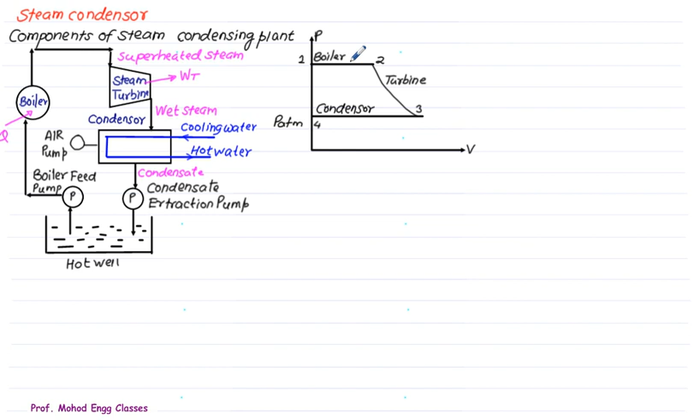The given Rankine cycle can be represented on a PV diagram. Here 1 to 2 is the constant pressure heating process in a boiler. 2 to 3 is the isentropic expansion in the steam turbine, and 3 to 4 is the heat rejection process in the condenser. 4 to 1 is again the feedwater process.

If the condenser is not used, then the expansion for maximum work is up to atmospheric pressure. The steam, if exhausted up to atmosphere, can be given to this, and in that case the work will equal the area 1, 2, 3, 4, from P1 to the boiler pressure to atmospheric pressure.

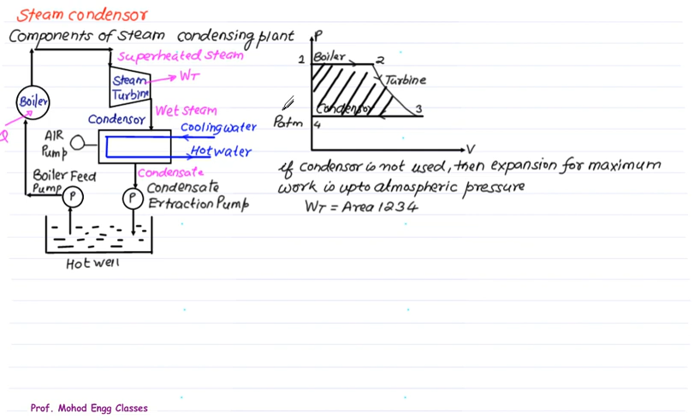If we use the condenser, then it is possible to expand below atmosphere, and in that case there is an additional area represented by 3 to 4, where this pressure is lower than atmosphere. The work developed by the turbine will be 1, 2, 3', 4', and we find this work is more compared to the original work 1, 2, 3, 4 because of this additional area. So this is the extra work produced in the steam turbine because of the condenser.

Therefore condensers are essential and important parts of a steam turbine power plant. Since we keep the same heat supply to the boiler, work done is increased, therefore there is an increase in thermal efficiency. The condenser improves the efficiency of the power plant by decreasing the exhaust pressure of the steam below atmosphere.

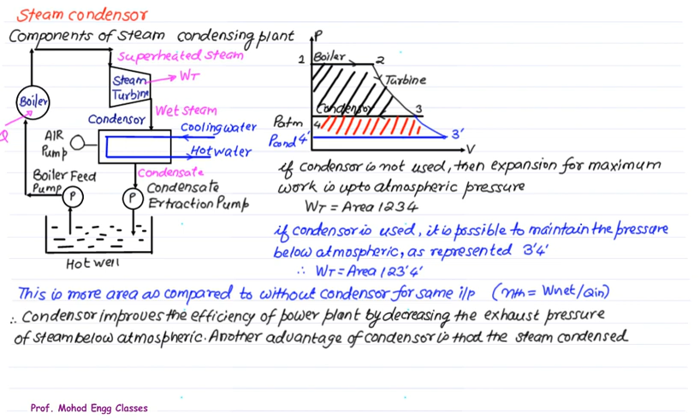Another advantage of the condenser is that the condensed steam may be recovered to provide a good source of feed water to the boiler, and this reduces the cost of the water treatment plant.

Normally we use water from stored water, which needs to be chemically treated. If we use the same water again and again from the condenser, it will save the cost of water treatment.

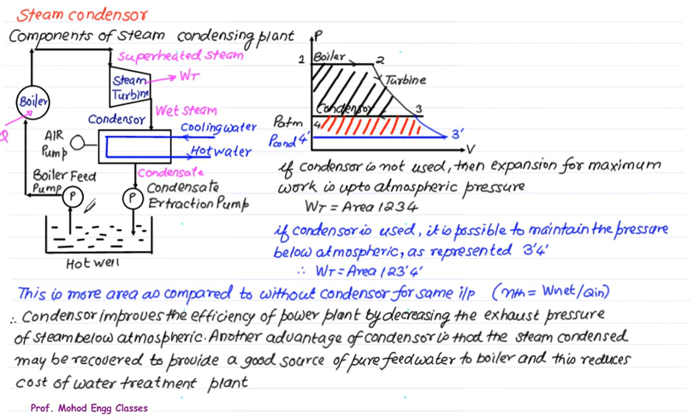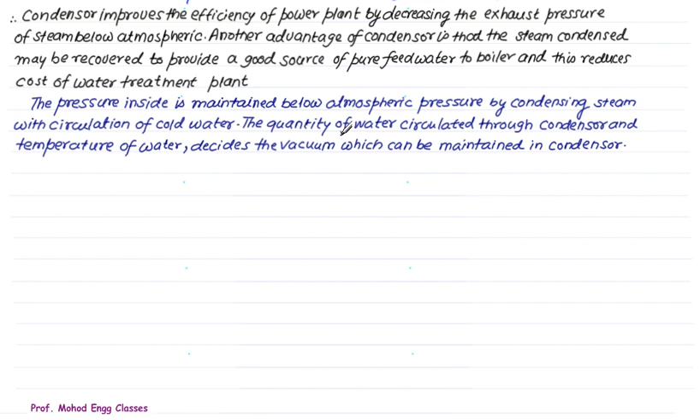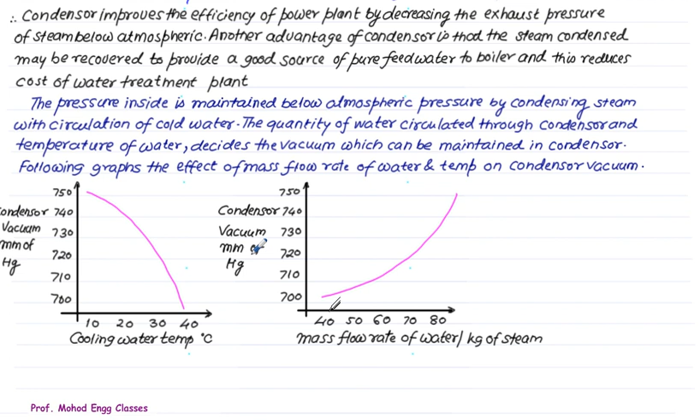If we observe the effect of mass flow rate of water per kg of steam on condenser vacuum, we see that as we increase the mass flow rate, the amount of heat removed from the condenser is very high, so the pressure drops drastically. If we maintain around 80 kg of water per kg of steam, we get a vacuum of around 750, and if we have a ratio of 40, we can maintain a vacuum of around 700 mm.

Before we discuss the condenser, let me give some initial idea about the relation between gauge pressure, atmospheric pressure and absolute pressure.

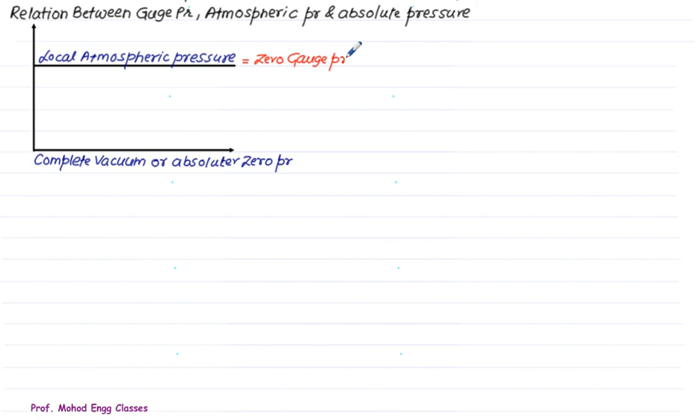If we measure the pressure above this, we get the positive gauge value. Any pressure measured below the local atmosphere is basically called vacuum, or is treated as negative gauge pressure.

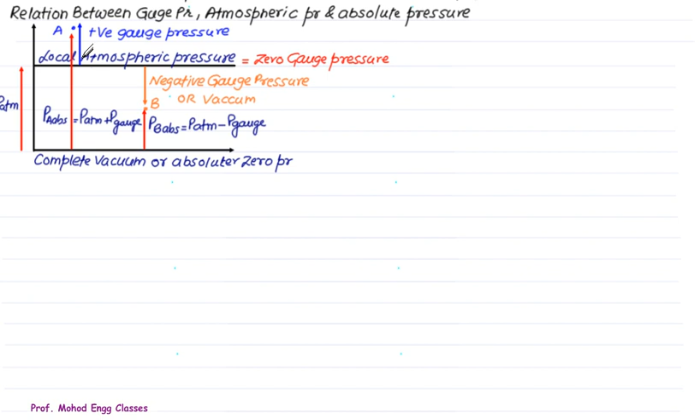We know that atmospheric pressure, particularly local, is measured by using a barometer. Hence atmospheric pressure is also called barometric pressure. The standard value is 760 mm of Hg, which equals 1.01325 bar, not kilopascal.

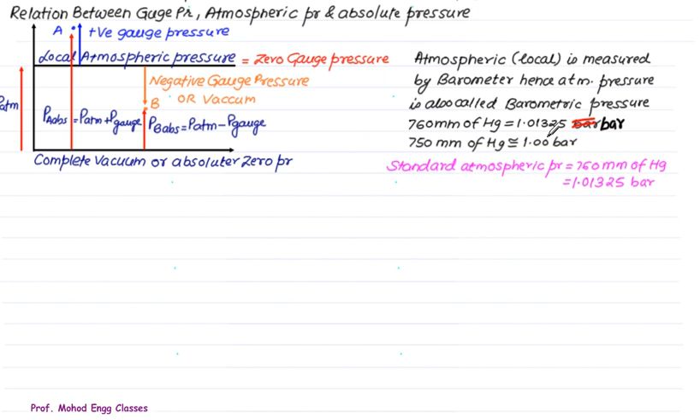Approximately 750 mm of Hg equals 1 bar. The standard atmospheric pressure is 760 mm of Hg, which equals 1.01325 bar.

In case of condenser, normally two terms are used. One is vacuum in the condenser, and this vacuum is to be corrected with respect to the standard atmospheric pressure. Normally vacuum is measured with respect to local atmospheric pressure, and if this vacuum is referred with reference to the standard atmospheric, it is called corrected vacuum in the condenser.

We have the same diagram here. This is zero pressure, and 760 mm of Hg is the standard atmospheric pressure. Let's assume that the local atmospheric pressure is less than the standard atmospheric pressure, though local atmospheric pressure can also be greater than standard. For the present case, we will assume that the local atmospheric pressure P atmospheric is less than 760 mm of Hg. In the problem, if you are given any vacuum, that vacuum is always treated with the local atmosphere.

So using that value, you have to move downward because vacuum is always a negative quantity. If you measure this point's pressure with reference to this one, it is called absolute pressure in the condenser, which we refer to as P mix. So P mix is the absolute pressure in the condenser, which equals the atmospheric pressure minus gauge pressure, or P atmospheric minus P vacuum.

P mix is given by P local atmospheric minus P vacuum. If we try to measure the same value from the standard atmospheric, our P mix remains the same. This reference value, measured with reference to standard atmospheric, is called corrected vacuum, and we know that the P mix is not going to change.

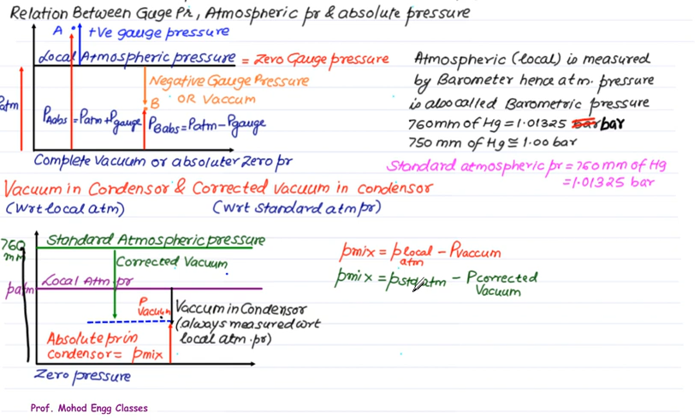Let's take one simple problem here. A vacuum of 68 cm of Hg was maintained in a condenser with a barometer reading of 75 cm of Hg. Find the corrected vacuum to a standard barometer reading of 76 cm of Hg.

In the problem, we have given the vacuum pressure equals 68, and since 1 cm is 10 mm, that is 680 mm of Hg. The local atmospheric pressure equals 75 cm, that equals 750 mm of Hg, and the standard barometer is 760 mm of Hg.

So P mixture is given by P local atmosphere minus P vacuum, which is equal to 750 minus 680, that is equal to 70 mm of Hg, the absolute pressure, which is P mix here.

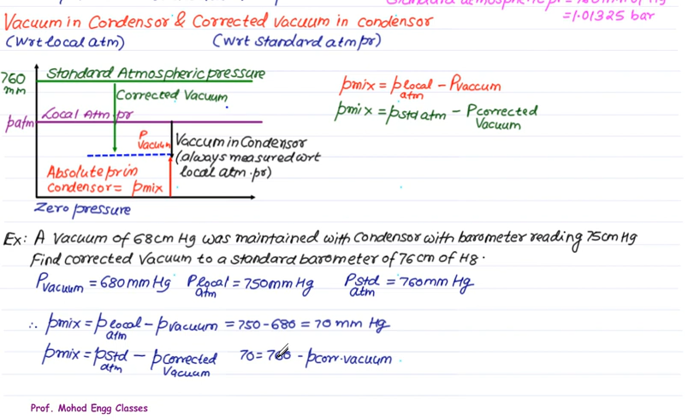This P mix remains the same, equal to 760 minus corrected vacuum. So P mix equals P standard atmosphere minus P corrected. But we already got the value of P mix equal to 70, so we'll substitute 70 here. Standard is 760, so the corrected vacuum with reference to the standard atmospheric pressure is 760 minus 70, that equals 690 mm of Hg.

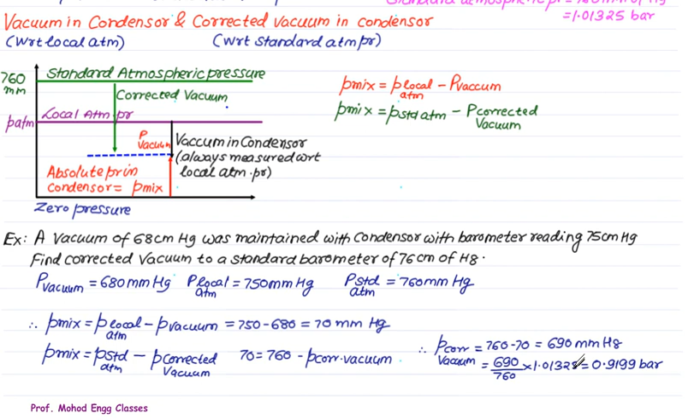We can convert this 690 using a standard conversion ratio: 690 divided by 760 into 1.01325 is approximately equal to 0.919 bar or 0.92 bar.

In the condenser, we normally use Dalton's law of partial pressure, because in the steam condenser we are using steam and air. So we have to apply Dalton's law of partial pressure in the case of condenser. Dalton's law basically deals with the mixture of gases, which consists of a number of phases.

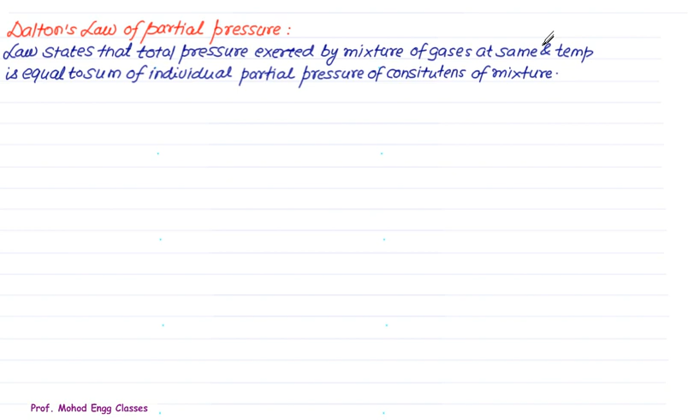The law states that the total pressure exerted by a mixture of gases at the same volume and temperature is equal to the sum of the individual partial pressures of the constituents of the mixture. Suppose a gas has two constituents, gas A and gas B, then according to Dalton's law of partial pressure, the total pressure due to the mixture, P mix, is the pressure due to gas A plus the pressure due to gas B.

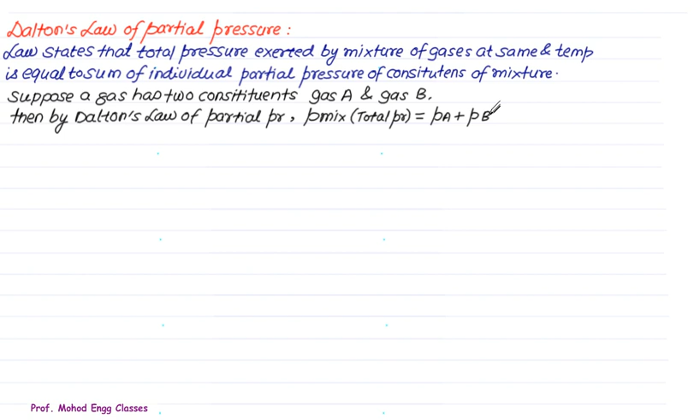The water circulated in a steam power plant contains water and dissolved air. During the boiler operation and the steam turbine passage, they act as a homogeneous mixture of vapor and air. In the condenser, during condensation, this air is liberated from the steam, and therefore the condenser volume is filled by both steam and air.

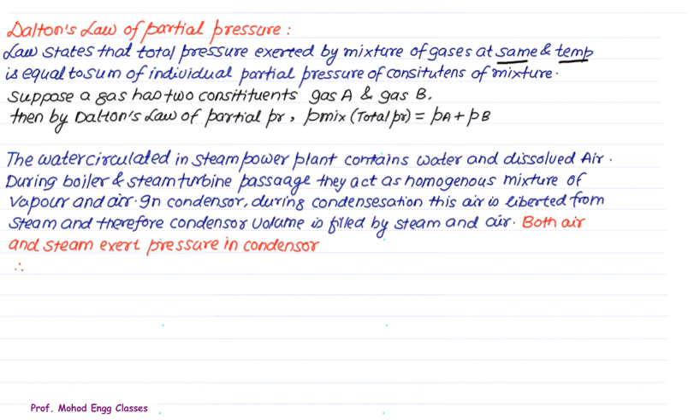Both the air and the steam exert pressure in the condenser. This total pressure is called P mix. The entire condenser volume is filled with the mixture of steam plus air. They are at the same volume and same temperature, so we can apply Dalton's law of partial pressure in the case of a condenser. According to Dalton's law, the total pressure in the condenser, P mix, is equal to the partial pressure of air plus the partial pressure of steam.

Partial pressure of steam we can obtain from the given temperature of the condenser using the steam table. We also know that the total pressure in the condenser, P mix, equals P atmospheric plus P vacuum. So either they provide you data of P atmospheric or data of P vacuum. For P vacuum you have to take the negative value, add it, and you can find P mix. Once we know P mix, we can find the partial pressure of air.

So the actual vacuum equals P vacuum, which is P atmospheric minus P mix. But P mix already equals P air plus P steam, so P vacuum equals P atmospheric minus the sum of partial pressure of steam plus partial pressure of air. This quantity can be increased if this term becomes zero. So ideally, the vacuum will be maximum if the partial pressure of air equals zero. From this we define the term called condenser vacuum efficiency.

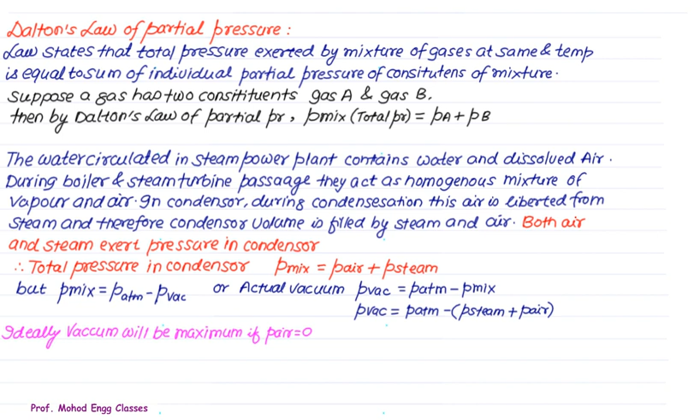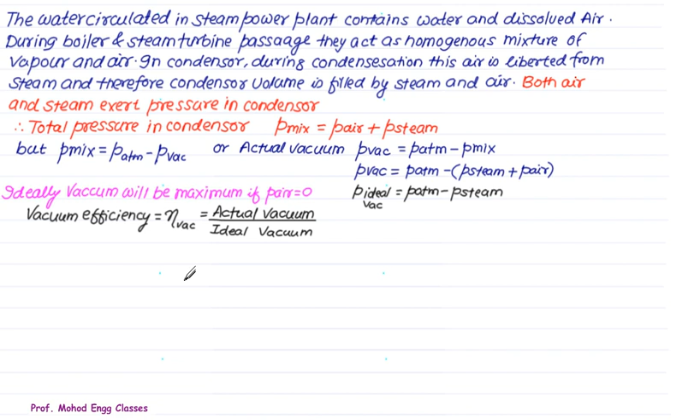So P ideal is equal to P atmospheric minus P steam. The ideal vacuum equals atmospheric pressure minus partial pressure of steam. Vacuum efficiency is defined as the ratio of actual vacuum upon ideal vacuum. If we substitute, P actual vacuum equals P atmospheric minus P mix, and ideal vacuum equals P atmospheric minus P steam. So this mixture consists of both PS plus PA, where PS is the partial pressure of steam and PA is the partial pressure of air.

If there is no leakage through the glands or packing, then P mixture will equal PS plus PA, and PA will be equal to zero because there is no mass of air in the condenser. So P minimum will be equal to PS. In that case, the vacuum efficiency will be equal to 100%, indicating that there is no leakage of air inside the condenser.

Factors which affect the vacuum efficiency: number one is air leakage. As air leakage increases, the mass of air will increase, therefore the partial pressure of air will increase, and once the partial pressure of air increases, the vacuum efficiency will decrease due to the increase in partial pressure of air.

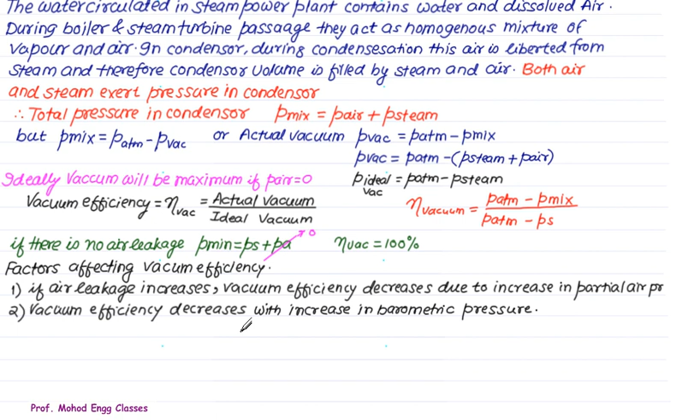Number two, the vacuum efficiency decreases with an increase in barometric pressure. So there are two parameters which control the vacuum efficiency, and we want the highest possible value. The third important parameter is the cooling water flow rate. If the cooling water flow rate is not sufficient, then the pressure in the condenser will increase, and subsequently it will reduce the vacuum efficiency.

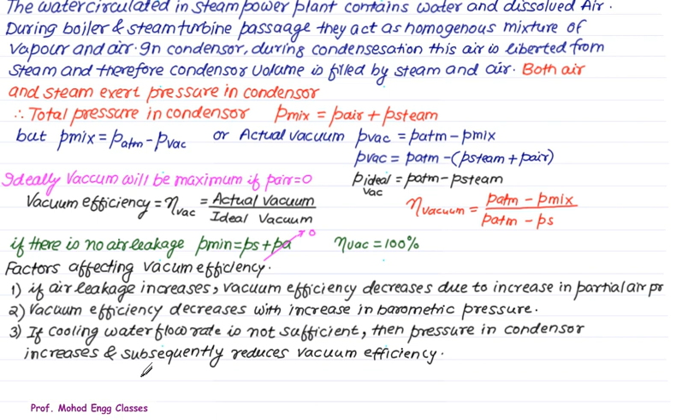Now that we are familiar with the steam condenser, Dalton's law of partial pressure, and the vacuum efficiency, let's do some basic thermodynamic analysis of the steam condenser.

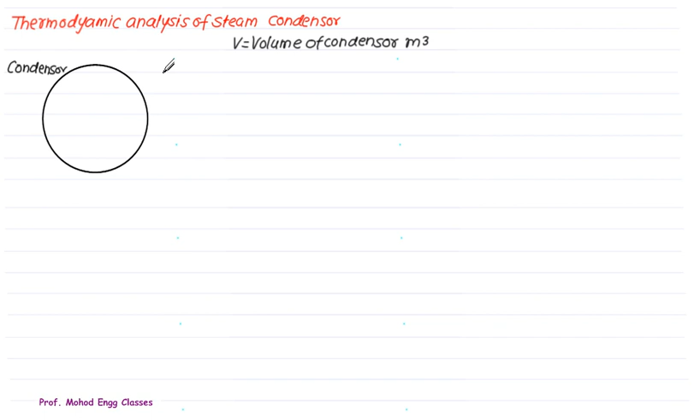Consider one spherical shell, that is a condenser having volume equal to V. This complete volume is filled both by steam and air. We cannot separate air and steam here; that is a homogeneous mixture. So the total volume V is also the volume of air and the volume of steam. For simple thermodynamic analysis, first we neglect the mass of air, and in practical situations also, the mass of air is very small compared to steam, so we can neglect the mass of air to compute the mass of steam.

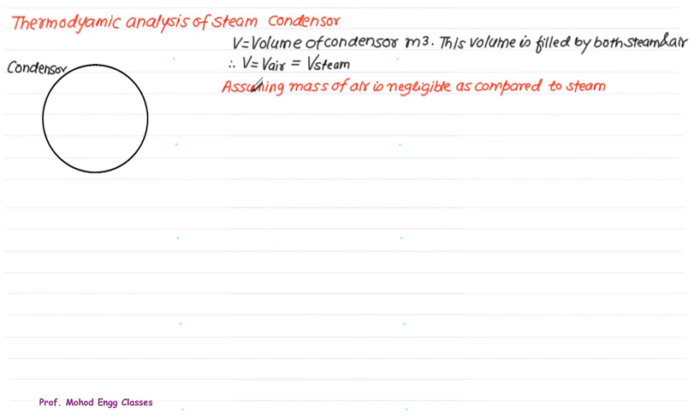The wet steam from the turbine passes through the shell side, and the condensate is collected from the bottom side. Let m dot s represent the mass flow rate of water or condensate in kg per second.

At inlet to the condenser, the point number 1, we will say H1 is the enthalpy of steam at inlet. Depending upon the condition of steam at the turbine outlet, we have H1 equal to Hf plus x Hfg when the steam is wet and Hg when the steam is dry. So at exit we have a condensate, which is the liquid water.

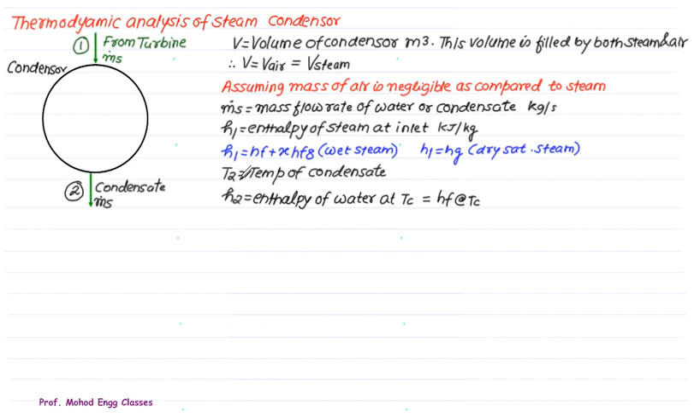So let's say T2 is the temperature of condensate. Many times we will denote this by Tc also, C for condensate. H2 will be the enthalpy of water at Tc, which will be equal to Hf at Tc. So steam is flowing with the mass flow rate of ms. H1 and H2 is the change in enthalpy. So Q, the heat rejected by the steam, is the product of mass multiplied by change in enthalpy, H1 minus H2.

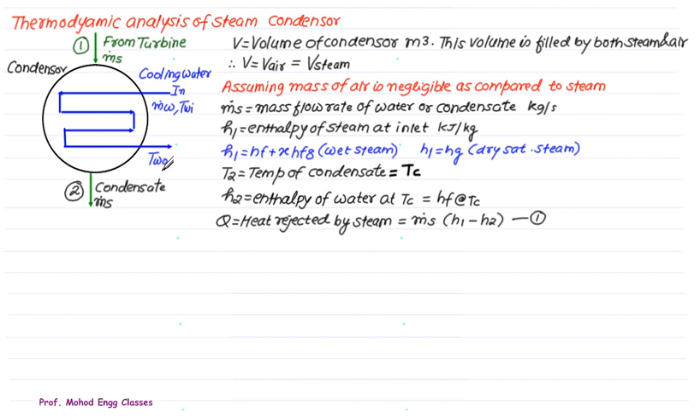The heat rejected by the steam is carried away by cooling water. So cooling water is flowing through a number of tubes. Let m dot w represent the mass flow rate of cooling water and the corresponding inlet temperature is TWI, and let the hot water temperature be TWO. Mass flow rate of water is in kg per second, same as the steam. TWI is the water temperature at inlet and TWO is the water temperature at outlet.

The heat gained by cold water, which is rejected by the steam, is Q equal to m dot w into CPW into TWO minus TWI. CPW you can take as a standard value, 4.186 kilojoule per kg per Kelvin. If we balance this, we can find out the quantity of water required for the above cooling effect.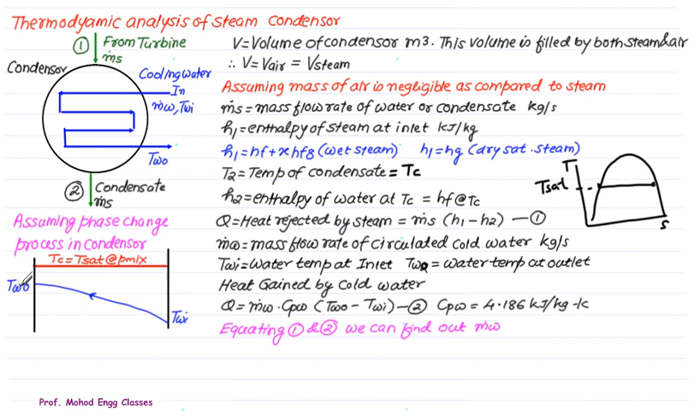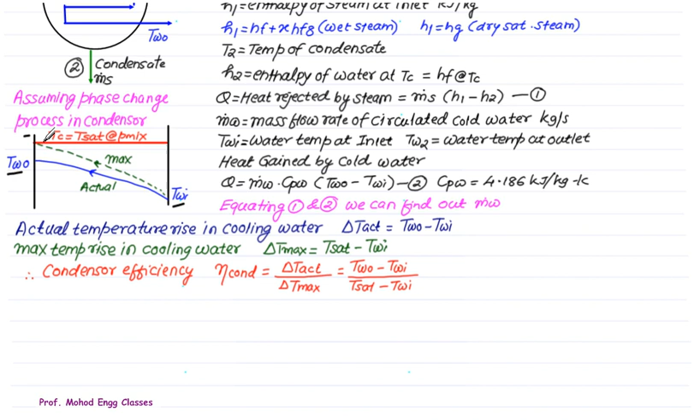The maximum possible temperature rise is possible if the outlet temperature is equal to the Tsat of the condenser. So the maximum temperature rise is possible in the case of ideal situation. The maximum rise is Tsat minus TWI and the actual is TWO minus TWI. This is just an ideal situation. Since we have an actual rise and a maximum rise, we will define the condenser efficiency as the actual rise in the temperature of water upon the maximum possible rise. Actual rise is TWO minus TWI, maximum rise is Tsat minus TWI. This efficiency is very high, around 90 percent.

The calculation for mass of steam and air. So we have the same shell, V is the volume of the condenser, and this volume is entirely filled by both. So volume of air is the same as the volume of steam. We know that Pmix is equal to the actual pressure in the condenser, which is equal to atmospheric pressure minus the vacuum. Whenever we have vacuum we have to use the minus sign. The same pressure is also equal to the steam pressure plus the partial pressure of air by using Dalton's law.

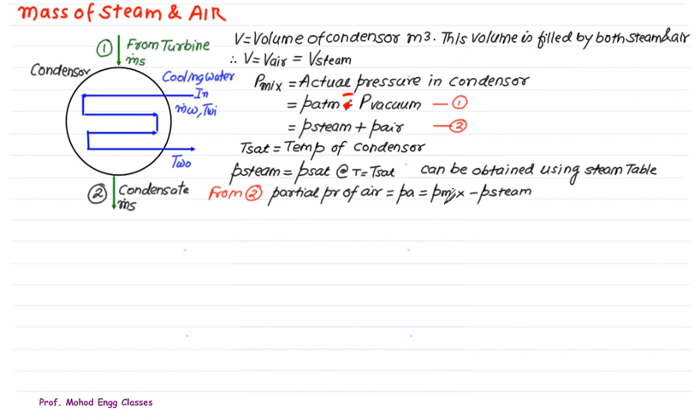If we are given the Tsat of the condenser, then we can find out from the steam table the partial pressure of steam. Once we know the partial pressure of steam and the total pressure in the condenser, we are able to find out the partial pressure of air. So from equation number 2, the partial pressure of air is Pmix minus Psteam. The mass of the steam in the condenser is given by volume divided by the specific volume Vg. If it is wet, you have to use x into Vg.

Take care for the steam: since the steam is not an ideal gas, do not use the equation PV equal to mRT. Rather use the equation V upon Vg. But air can be very well modeled as an ideal gas, and we can use the equation PV equal to mRT, where m is equal to PV upon RT. So when you are finding the mass of air, you have to take the partial pressure of air and the temperature of the condenser. The volume remains the same, R is the gas constant, which is normally equal to 287 joules per kg per Kelvin in case of air.

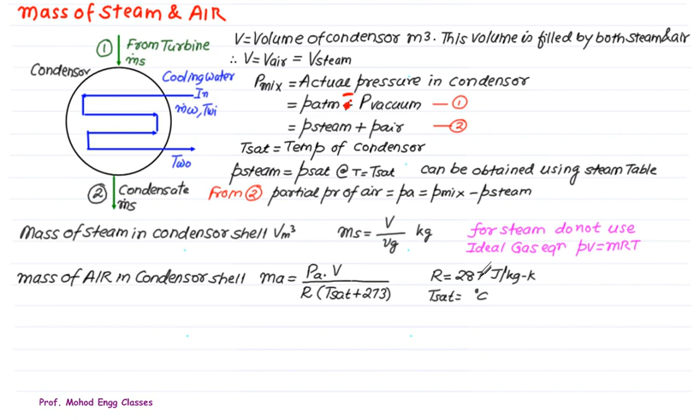Now from the knowledge of Dalton's law of partial pressure, the mass of steam condensed, vacuum efficiency, then condenser efficiency. Let's solve some basic problems based on condenser in the next few lectures.